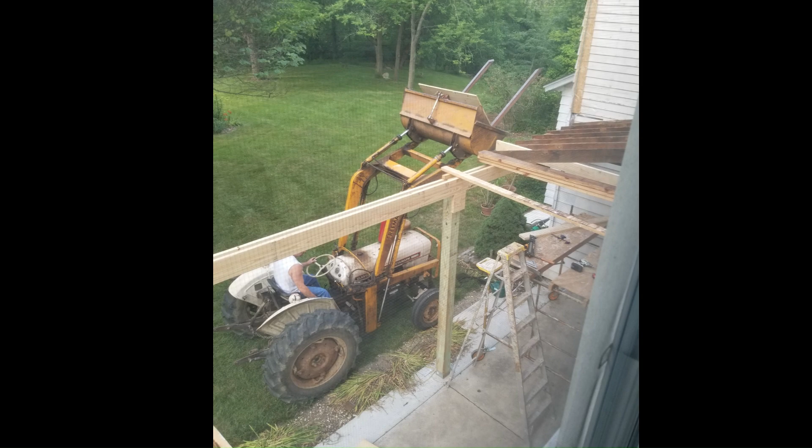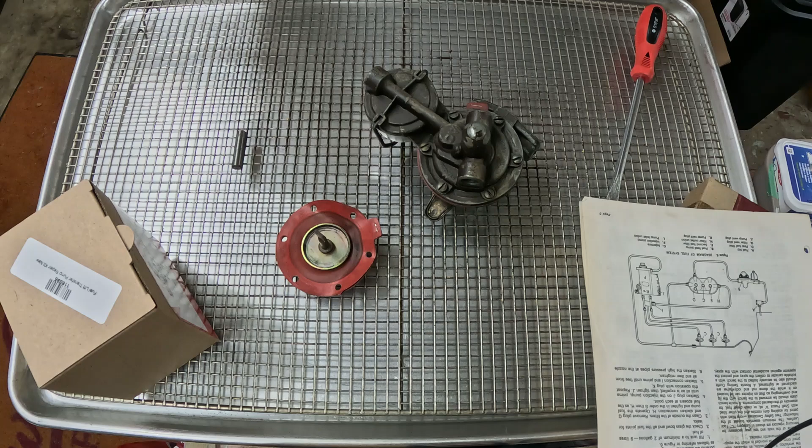Today we are looking at the fuel pump off of the David Brown Selectamatic 880. This fuel pump was also used on the 780 and the 770, all of which had the 3-cylinder diesel engines. And what the fuel pump did is it was considered a lift pump.

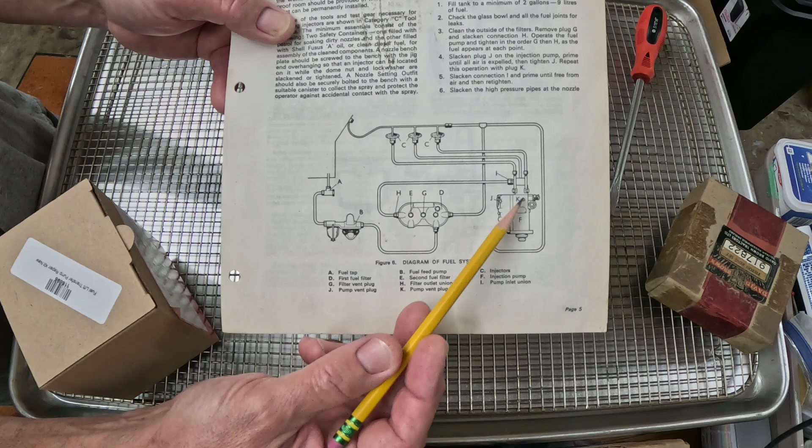And as we look at our diagram here, the lift pump comes off our fuel tank, is connected to the lift pump, which then pressurizes the fuel up into the fuel filter system, and then on into the injector pump, which then takes it over to the injectors and fires it into the engine.

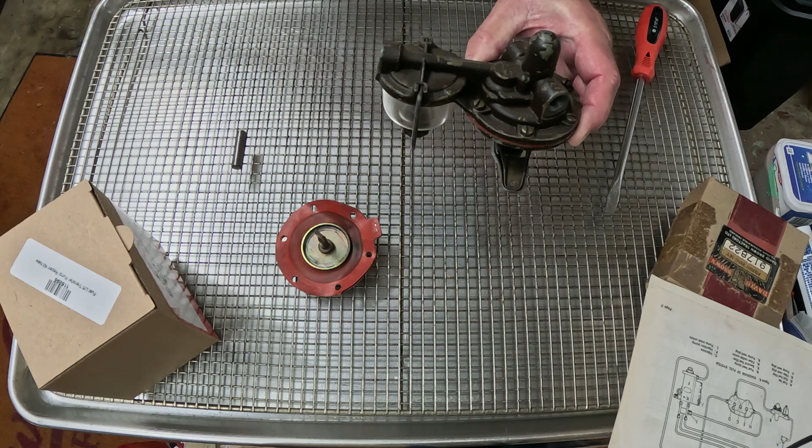This is the original lift pump. I did purchase a replacement back when I restored it in 21-22. That pump has worked fine, but we have this one, and we're just going to talk a little bit about it, take it apart, see some of the internal components on it and how it operates. This is mounted on the right side of the block under the fuel filters and the fuel system.

Here we have the inlet that comes from the fuel tank, a glass sediment bowl, and what that will do is collect the bigger pieces of sediment, and they will be trapped in this bowl. There's a screen up under here for the return into the pump so the particles can't get out of the bowl and further into the pump.

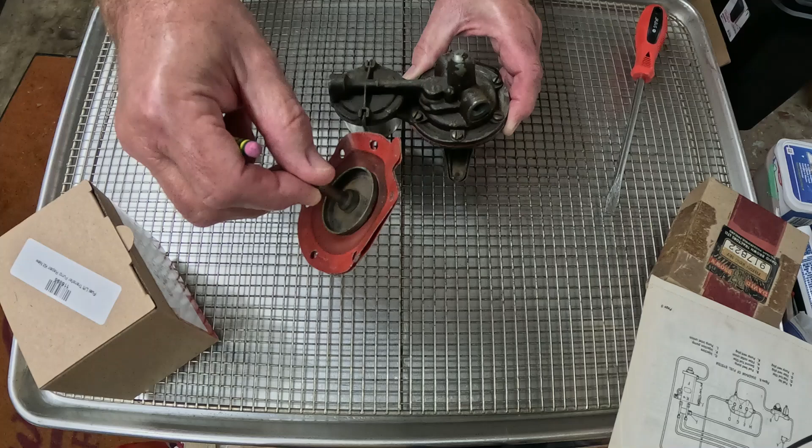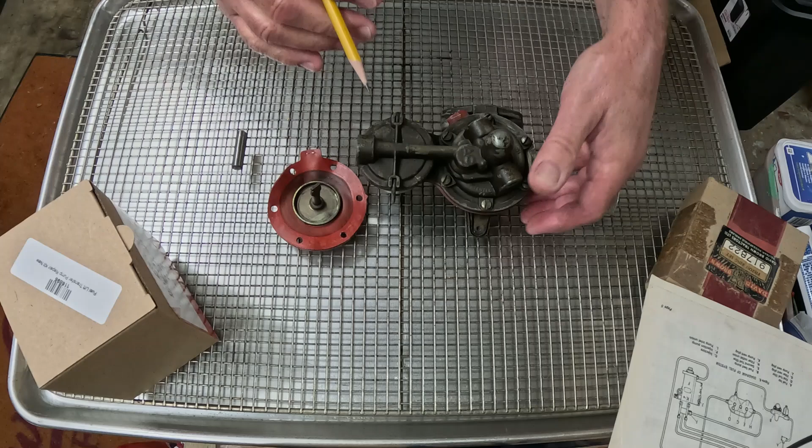Inside the pump here is a diaphragm, and we have one here. This is one of the old ones. This is the top part of the diaphragm. This is where the fuel would be. The bottom part of it, there's actually a spring in here, and then this T-looking fitting here hooks into the handle, so you can operate it manually. And that is how you would vent the system whenever you remove anything and you get air in the system. You can pump that manually to get the air out.

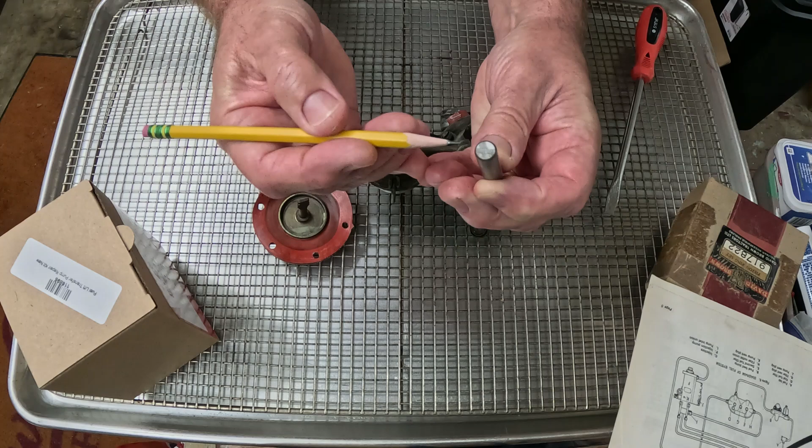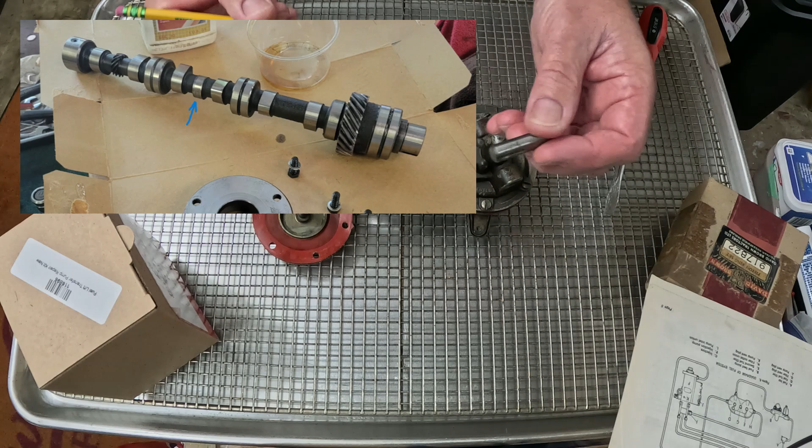The pump is operated via a push rod, which we have one here. This is the original one. If you can see, it's worn a little bit right in there. And this end is worn right across there. This is the end that was on the fuel pump. The other end goes through the block, and this rides on the camshaft. And there is a lobe on the camshaft that this rides on.

As the camshaft spins around, it would push it in and out of the block. That movement is applied back here to the lever on the pump, which causes it to go in and out. That's what operates the diaphragm inside of here.

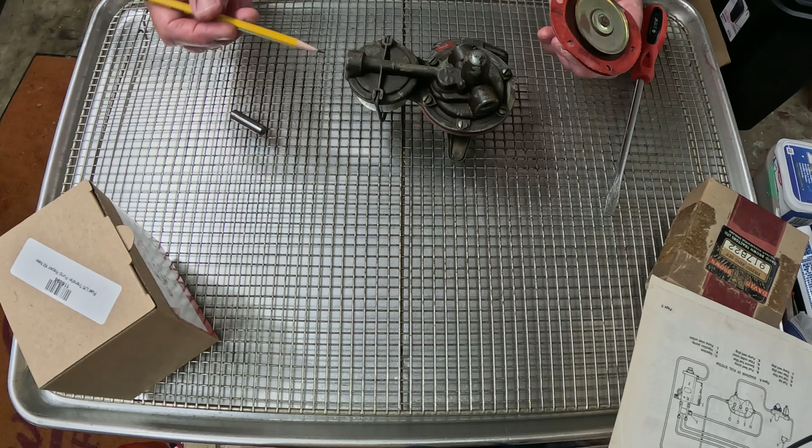So as this diaphragm is going basically up and down inside the pump, and it's not much, but it does move a bit. At first, when it goes down, it pulls the fuel in from the tank into the chamber here. There's a check valve right in here. This valve only allows the fuel to travel in. Once the diaphragm starts to push back up, this valve will shut, so that the fuel can't go back into our bowl or the tank.

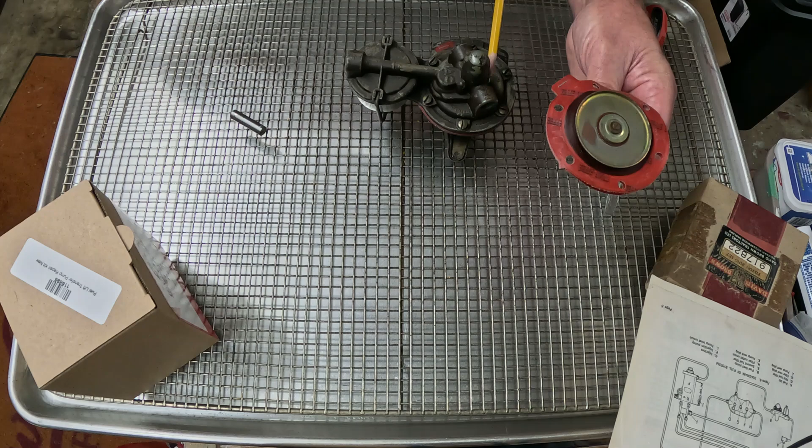If you didn't have the check valve, this thing would move up and down and the fuel would just kind of go back and forth and it wouldn't go anywhere. So they have a check valve here. There's also a check valve inside here for the outlet. It does the same thing. When this is pulling down to draw the fuel in from the tank, this one's open and this one's closed so that the fuel can't be pulled back from the filter system.

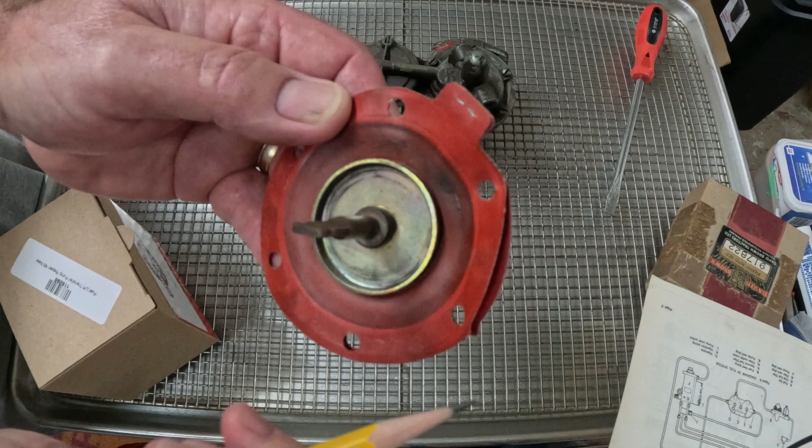The only real issues I had with the fuel pump is this diaphragm. And what happens on the diaphragm, if we look right in there, there's a tear in the diaphragm. This is a 2-layer diaphragm, but it gets a tear in it. Now this is the bottom side of it. This is the non-fuel side. This is the fuel side up here.

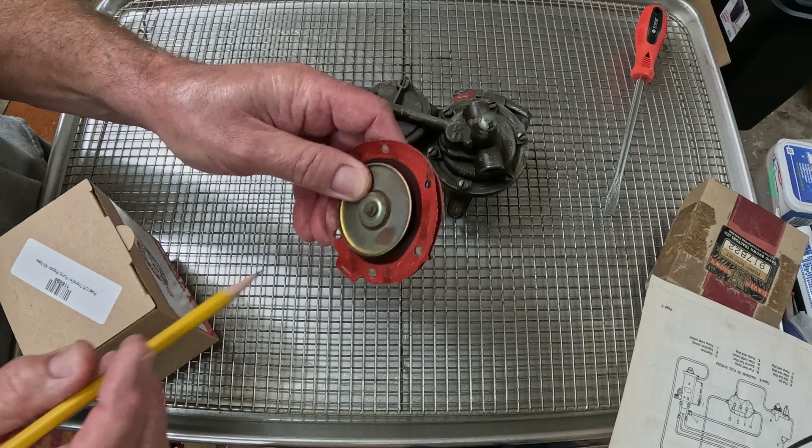And consequently, what happens, at first, you start leaking a little bit of fuel. Basically you're tearing the top layer here. You can see a crack right in there. That's the first to go, and the fuel will go in between the layers and actually start coming out around the housing here, all the way around this part here. And so that happens first, and you get fuel leakage on it. But then once it goes all the way through, it'll actually start pulling air in from the bottom here.

And once it pulls air into the system, well, you're DOA. The thing will shut down because you get air in the injectors and it no longer runs. So what we're going to do is we're going to take this thing apart a little bit.

What we have are these screws up here. Or yeah, 2, 4, 6 screws. And you will undo these screws, and then the 2 halves separate right along here, and then that's your diaphragm. You also have the sediment bowl here. You'll undo that. That is the bowl.

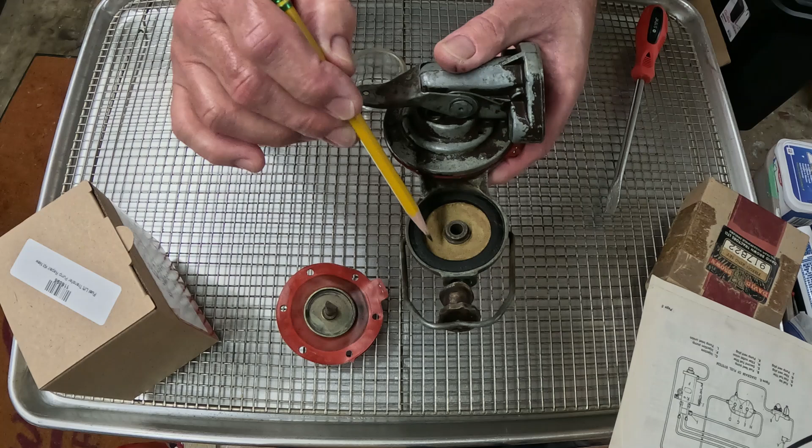And as we look in here, you have a screen all the way around here. This screen is what prevents the particles that are drawn in through this center hole from the tank and that settle inside the bowl. It prevents them from being pulled up into the pump because of that screen.

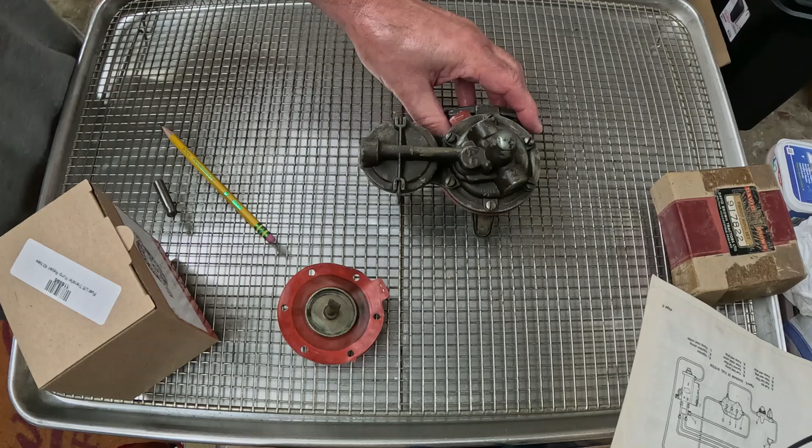So as we dismantle this thing, I got a magnetic screwdriver here. You're going to break these loose, kind of a crisscross pattern here a little bit. My screwdriver is magnetic, so it's fighting me to get on the heads of the screws here. And I hear it peeling away already. And it's not a bad idea to apply a little pressure on it, because like I say, this is spring loaded and you want to be careful. There's one screw.

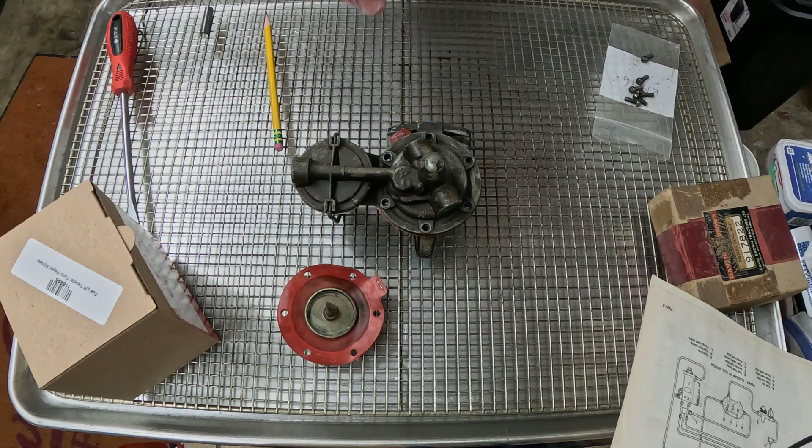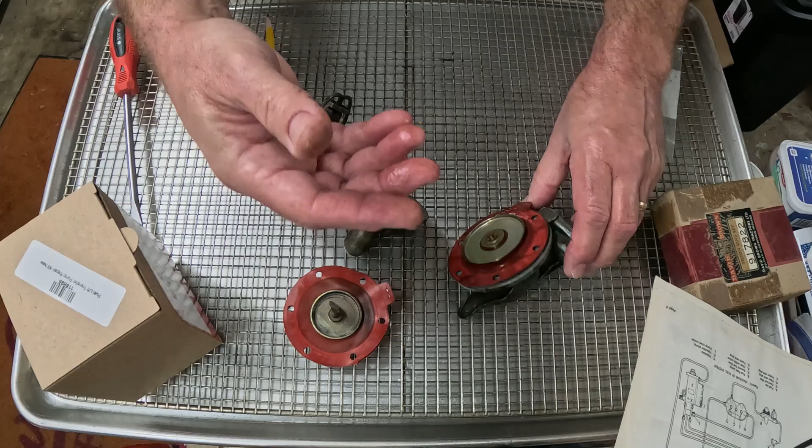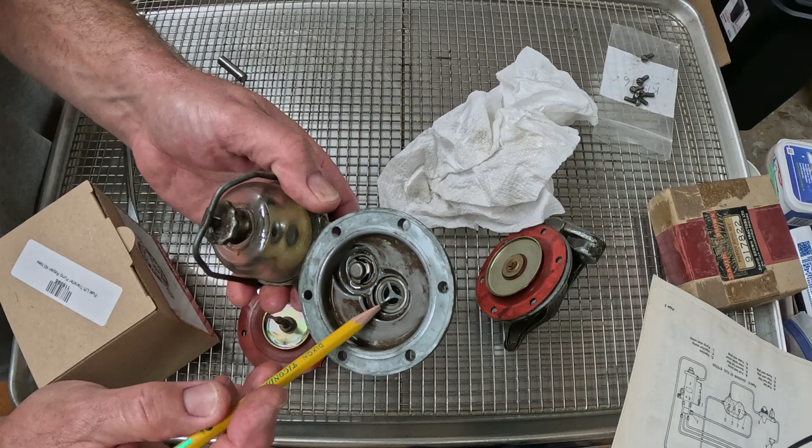So now this should come apart like so. The top half pulls away. There's our bottom half with our diaphragm in there. Set that down. Still has a little bit of fuel in it. So now in here, these are the check valves. There's one here and one here. They're both the same valve. This is one side of it and that's the other side of it.

And if you push on that, you see how that opens. Maybe we can't see that, but see how the pencil will go in there like that. This side it won't do that. This side will shut on you. But that is the 2 check valves that allow the fuel, in this case coming from the bowl. This one opens in to draw it in. And then when the diaphragm starts coming up, it pushes back down and closes this off. And then this one opens and allows the fuel to come out here in the front of the pump, which goes up into the filter system.

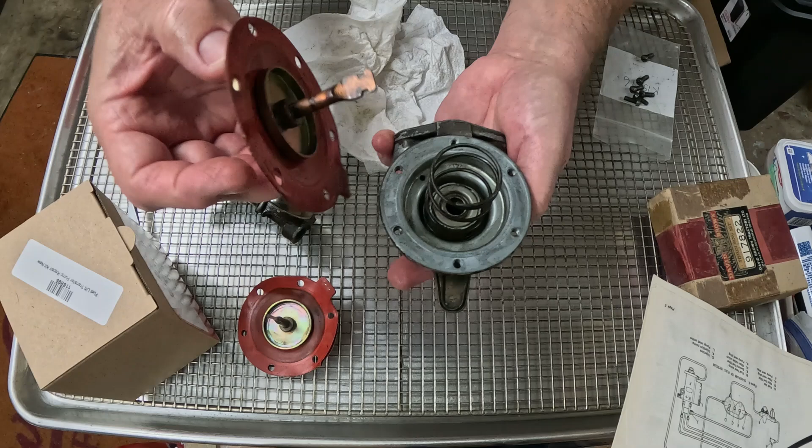And then the diaphragm is spring loaded. So we unsnap it and we lift up on it, and there it is. And then we have the spring. And this spring returns the diaphragm, so it keeps it moving. And then there's a little bit of a seal here, which looks like it's pretty much bad, probably. And that keeps dirt and stuff out.

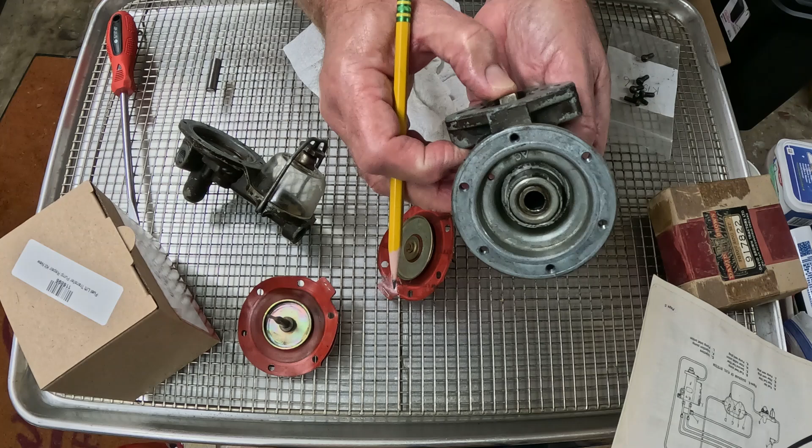Now you're going to get oil into this. There's a hole here for the push rod, which would sit on that, coming out of the block. But there's also a hole down here because this has oil that goes in on this mechanism, and then it drains back out at the bottom here, back into the sump of the engine. And then that pushes in and out, and that's what operates inside here to pull down on the diaphragm, which is connected to that shaft via that fitting there.

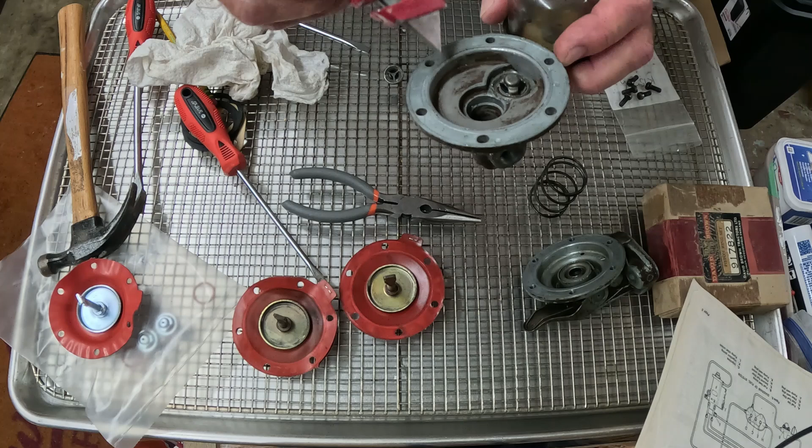So we just got this thing to pop. Now what I had to do, and we're talking about our little check valves. The one over here was already loose. And so what I did is I took my utility knife and I just kind of cut. You can kind of see down in here where they stamped the housing. So they fit these in here and then they stamped this to mushroom it over. This one had some kind of seal on it, it seems like, or sealer. And we just got it to pop out of there.

And what I did on it is I ran hot water on it. You can see the hot water down in there. And I heated the whole thing up. And they had some kind of sealer on there, it looks to me like, as we set this down here. We look right along in here, almost like a JB Weld type stuff on that. Oop. And so there again, my screwdriver's not magnetic enough, is it?

So there again, I heated it up and I took my utility knife and I dug around there a bit to get that out of the aluminum. Now the rebuild kit comes with the new diaphragm and your new check valves, as well as the gasket for the bowl and to mount it back on to the engine here. So all that comes with the kit that we purchased. But getting those things out was a little tough, so we're gonna take this over here and clean it up a little bit, and then we will come back.

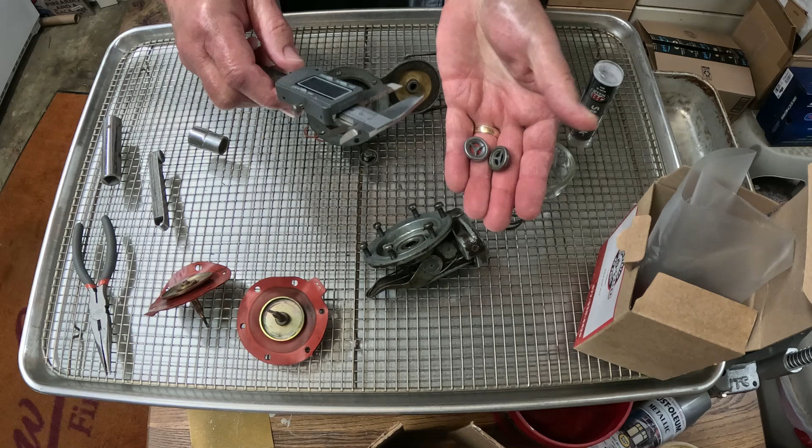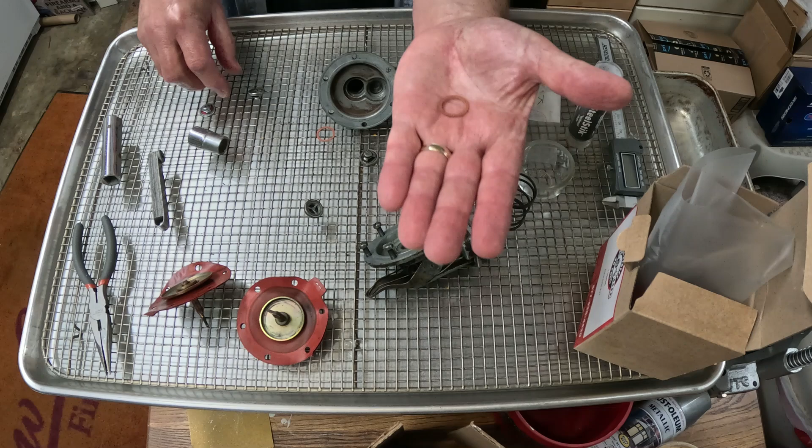So the new ones and the original ones are coming in at the same size as far as our distance across out here. So that's good, that's what we want. Now, shut that off. The new ones come with a gasket as well. And the gasket fits behind the check valve, if we put it in there like so. The original one did not have that.

But the issue that we have with it, particularly over here, that's not going to stay in there. That is so loose that no matter which way it goes, and it has to go the right way to work. That's the hole we had originally. I had to dig that out because it had like a JB Weld type material in there. So I'm thinking that perhaps this thing was machined wrong down in here. This hole was bigger than this hole, and this one seemed to be just crimped in. It's more of a press fit to fit the valve in there.

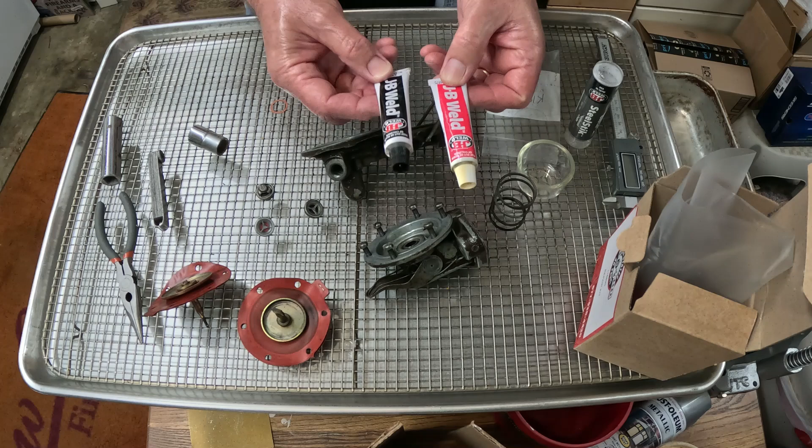And as we see it, it just kind of rocks in there. Can't even get it started halfway decent. Like so. See now there, it fell in there, but it's not gonna stay in there. I could probably pull it out with the pliers. So we may want to go ahead and use the JB Weld on both of them. I got a couple different versions here. Of course, we have our traditional JB Weld. You have your two compounds, you mix them together, and then it eventually firms up.

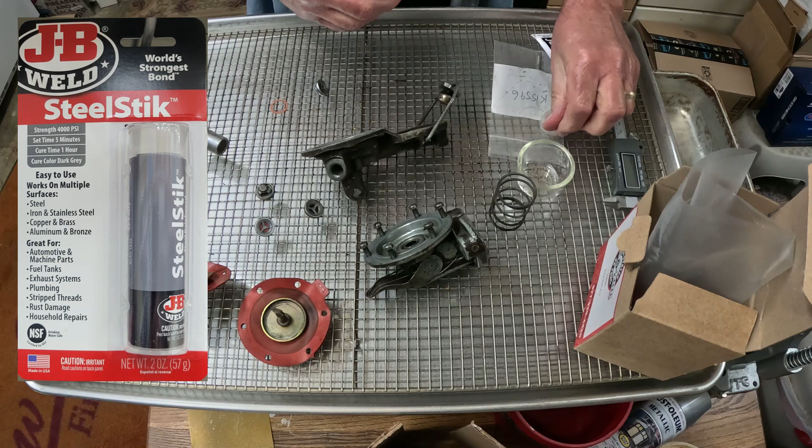We also have SteelStik. Now this one I've used before. And we have to cut a piece of it off. And as we see, it's black in the middle and gray on the outside. Those are the two compounds like you would find in the two tubes, only this is in a stick. You cut that off and you kind of knead that together so that you can utilize that for gluing it in. So we'll go ahead and break for a second here, and when we come back, we will go ahead and do that.

So let's cut a little bit of this off. Take the plastic protector off of it. And then we're just going to knead this together. Try to get a little bit of this in here. Now that I got this all kneaded together, see it's all turned black, the gray has disappeared, and that's what you're looking for on the SteelStik. And we'll kind of roll this out a little bit. And I'm just going to break some of it off down inside the hole here.

Now we can always crimp this again. Like I say, this was originally crimped in, and it did wiggle loose. One of the times that I rebuilt this pump, when I put a new diaphragm in it, it was loose, and I did crimp it in. I don't know if we can see that. We just have it right around the edge here. Not all the way around, but around it enough to hopefully seal that thing in there. And then it goes with the flat side up and the round side in.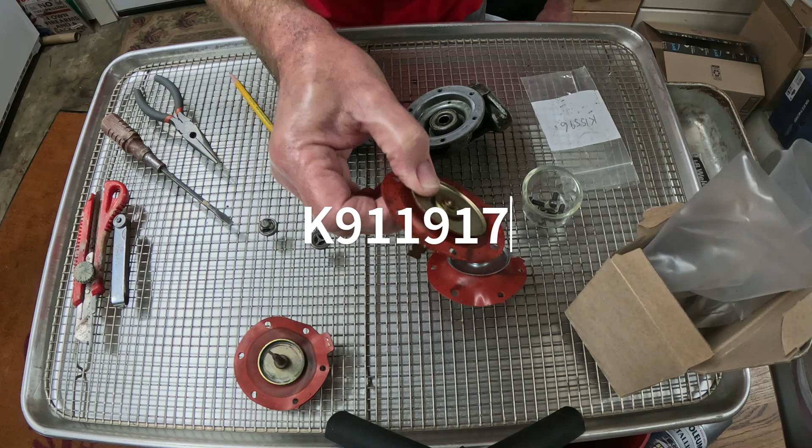So now we have to install the diaphragm. Now, all of the other times that I've rebuilt this pump, the only thing I got was the diaphragm. And that was from the Case dealership. That was the only part that they showed available for it. And so you have your spring. Now, I have seen some kits do have new springs with them. We did not have that with ours. Not sure why, but that's just the way that it is.

And we have our screws here. These are cheese head screws, they call them. Right there. Here in America, cheese. So we're going to go ahead and reassemble this. First of all, I'm going to show you the inside now. We've got a seal in here. This was stamped around the edges here, so I went ahead and stamped that back out. And we're going to try to, okay, pop the ring out of there.

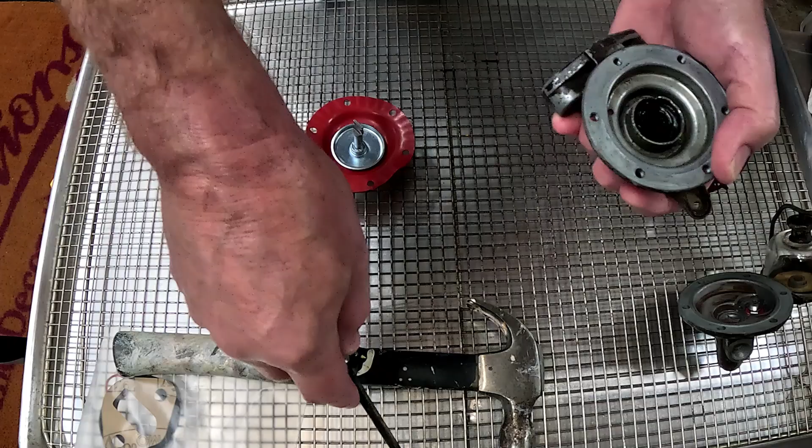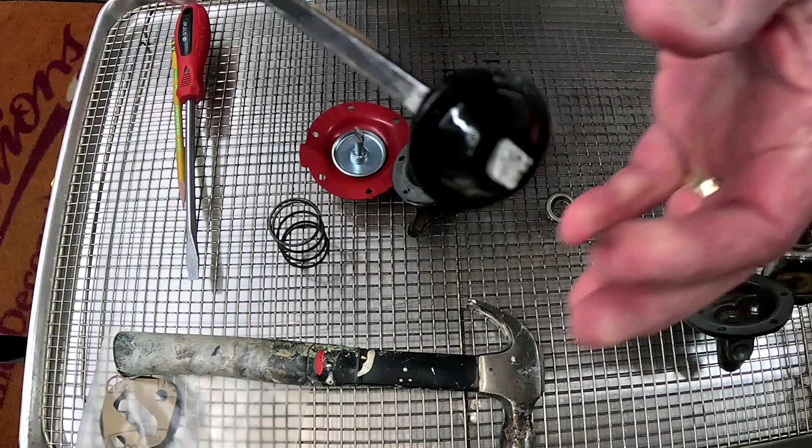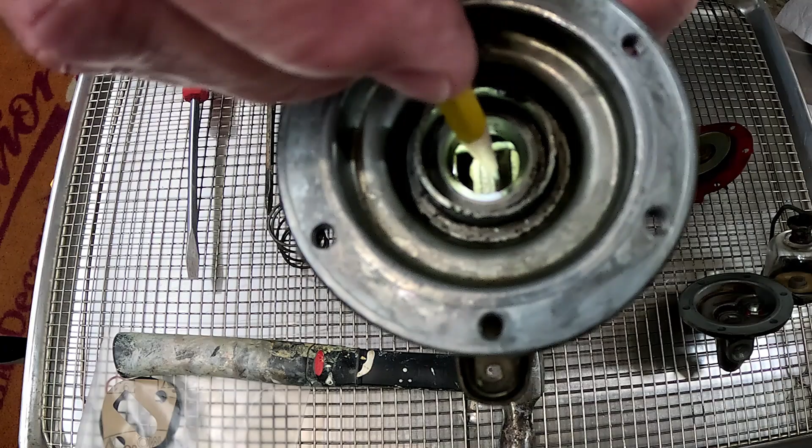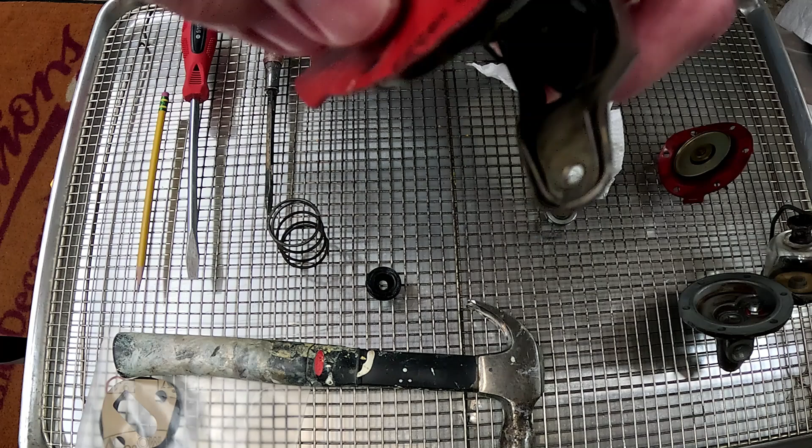And this is kind of a retainer cap that holds the seal in here, which we have right here. Go ahead and wipe this stuff off here. Now this is the seal that seals the mechanism down inside here. Let me wipe this out a bit. If we look down in there, we see the activating mechanism right here. Now what happens is the T end of this will fit into that. Lock into that.

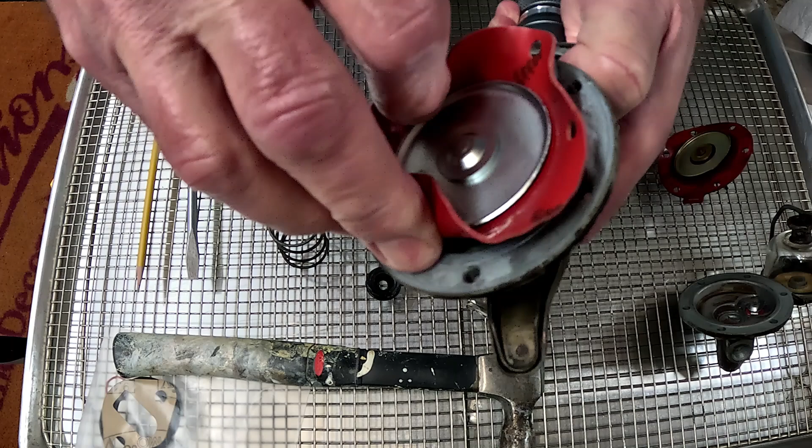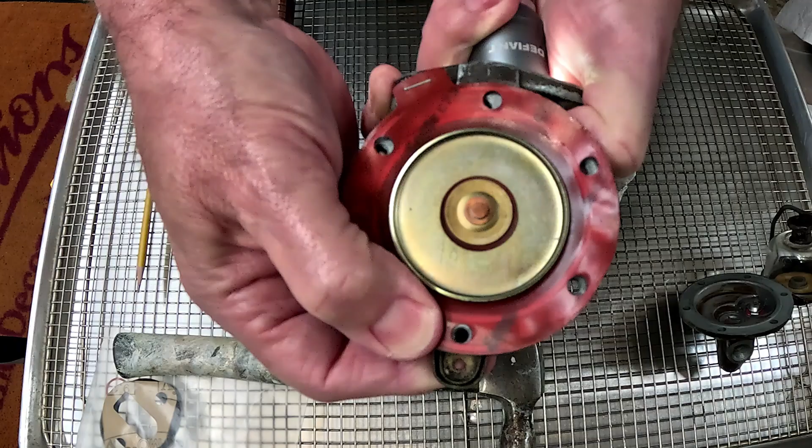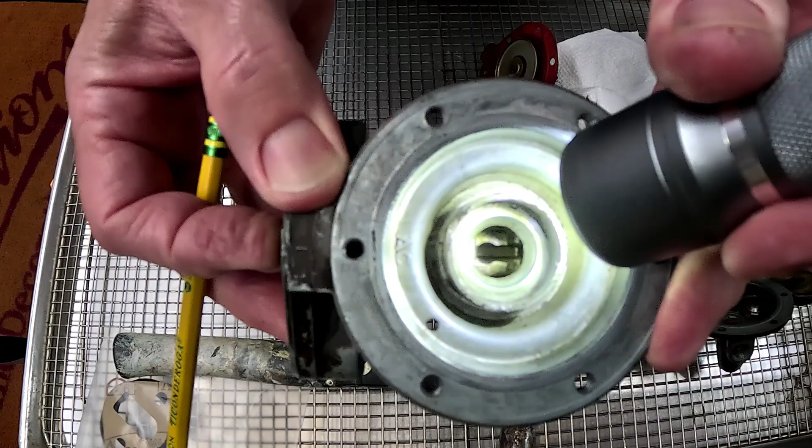I'll tell you what, this has been... So what happens is that's what activates the diaphragm, and it's going to lock into this like so. And then, see, now that's anchored so that as the pump moves, the diaphragm goes up and down. The push rod will activate it, making it go up and down. Like so. Anyway, that's the internal mechanisms on there.

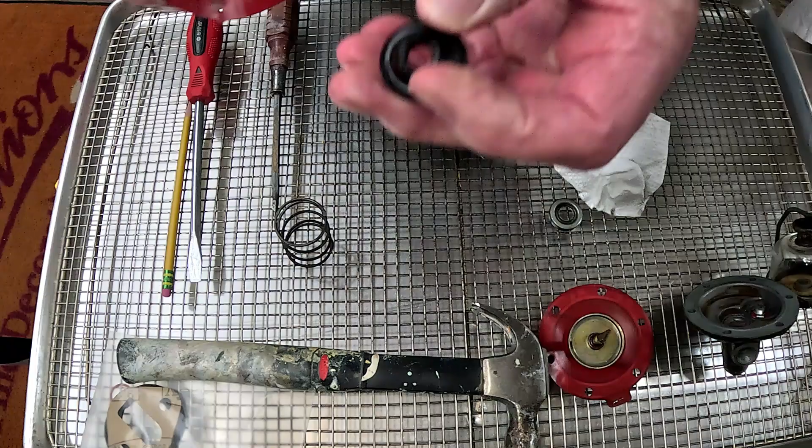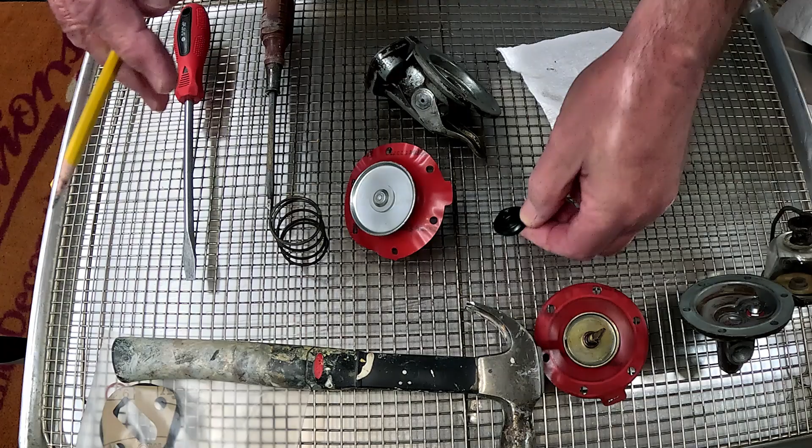And then of course this fits through there. And that's supposed to help seal the oil and stuff out of here. Obviously that's a loose fit. It's even cracked. You see we got a pretty good crack in it right there. So this seal would be nice if they had a seal like that for it. I've never seen one in any of the parts places. But I wanted to show that. And then, of course, you've got oil that's going to get back in here.

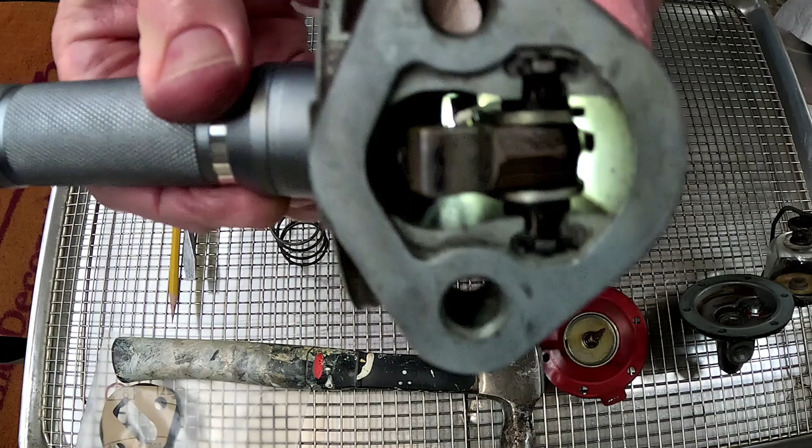As we look down in here, you can kind of see how it's lit up in there. And that's what gives you access for the oil. Comes in from the push rod up here, and then of course it drains back down the bottom. But see how that's all kind of opened up in there. Zoomed out a little bit here. Hopefully you'll be able to see me. I'm pulling this up close to me, and we're getting out of our camera range. So anyway,

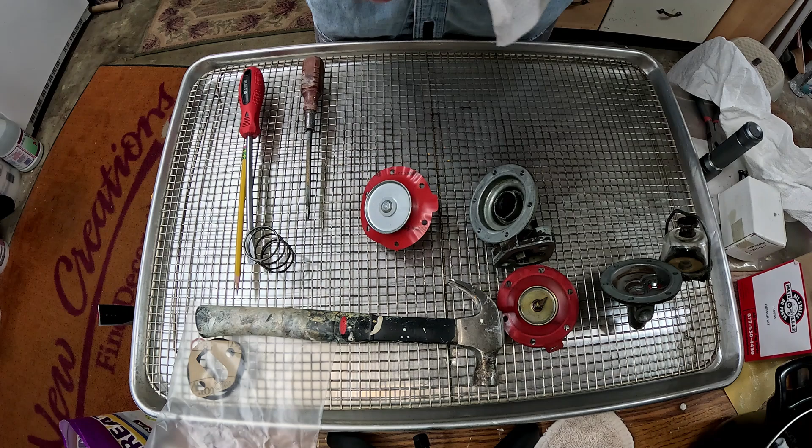just wipe a little bit of the debris out of that seat down in there. And we'll go ahead and put our little rubber seal in there. We got the retaining cap. I'll go ahead and wipe that off as well. I never noticed any oil leaking out of this particular piece. That doesn't mean that it didn't, I guess, but then we'll push that down in there. Give it a few taps, compress it down in there a little bit.

Of course, we'll be careful with this. You don't want to break it. So we got him put back in there. Okay, so the spring is going to seat down in the bottom of the housing here. And it's also going to seat into the cup of the bottom of the diaphragm. This is the fuel side, and this is the bottom, the oil side, the engine side, I guess we would call it.

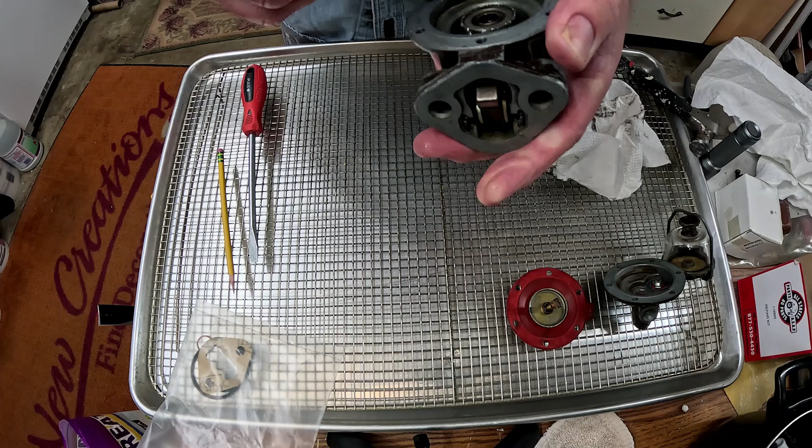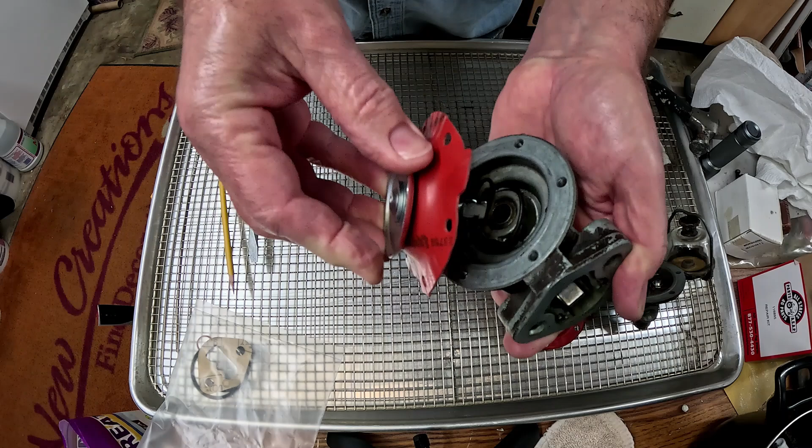And we're going to start this thing. We find our orientation tab, which is right here. And we should be able to start it down here, but that's not going to work because the orientation on this thing is off. So we need it to go in. We need our shaft, our T-fitting here, to be in parallel this way, so that it fits into the activating mechanism, and then we give it a turn to lock it in. So that's what we're going to attempt to do here. Way down in there.

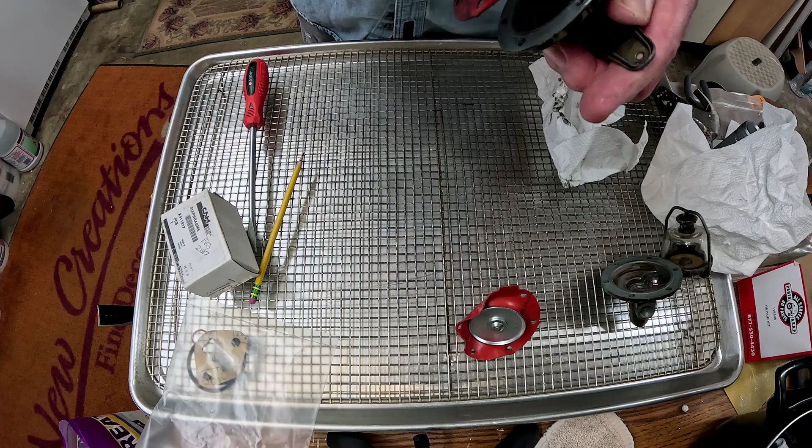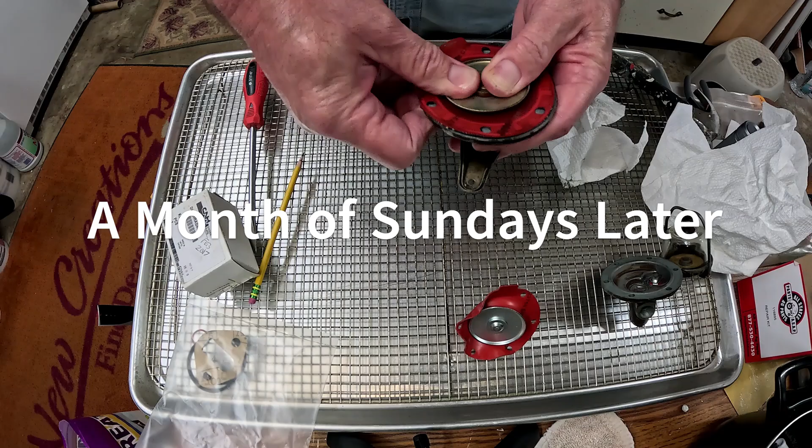Well, maybe I should just edit this as this is how you take it apart. There's no way to put the damn thing back together.

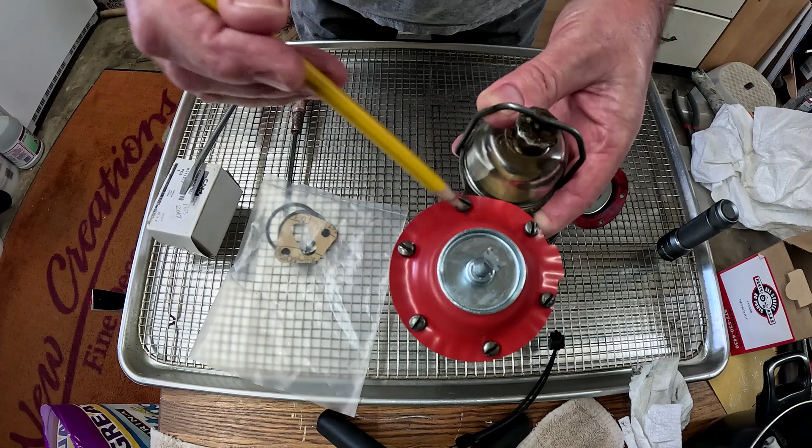So with our new diaphragm, we've got it in here, and I went ahead and put the screws in. This is the upper part of the fuel pump, the housing. I think this whole pattern, or bolt pattern around the outside, and I think the overall diameter of this diaphragm is too big for this pump, because once these screws are lined up here, now when I inserted it into the lower half and tried putting the two halves together, then these bolts didn't line up. They pushed out too far away from the housing.

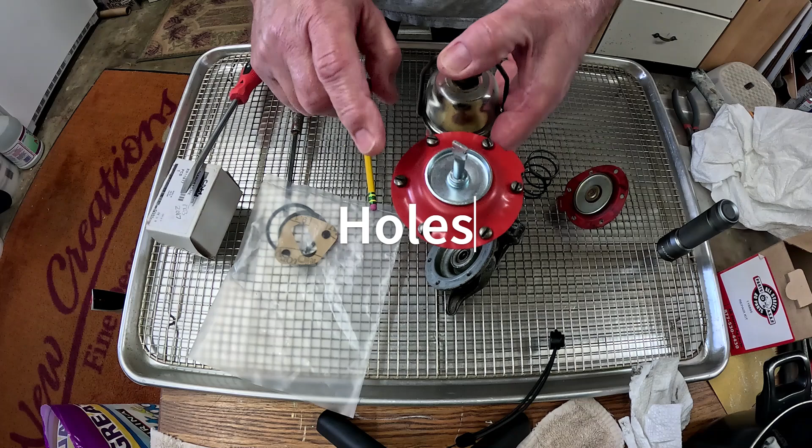So I think that this new diaphragm is just too big of a diameter for this pump. Once you get it back together, you can't get it to bolt together. So what we're going to do, I'm going to throw that down. There's just no way really to get these things to level out to look at them. But we're going to go ahead and install the original one, and at least you'll know how to do that.

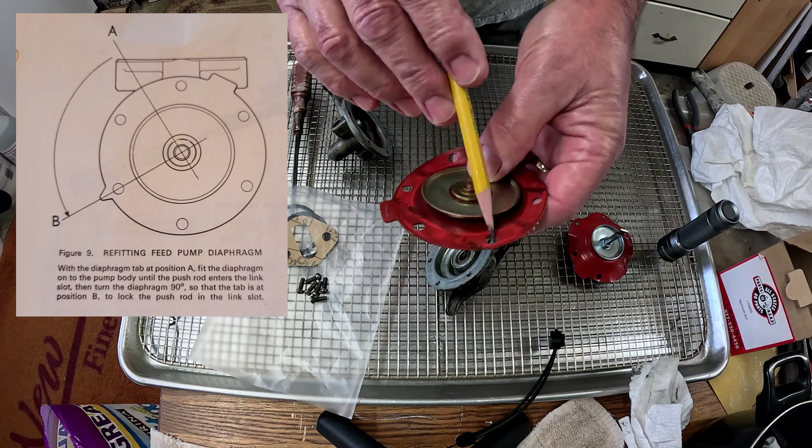Now, by the orientation in the manual, we have a little index mark right there. We got 2 holes, and then we've got this tab that's stapled together. The picture in the book shows 3 holes, so this tab would actually be over here. So the orientation of this thing is pretty much off scale. But what you want to do is insert this so that we are parallel here to the front and back of the pump. And I'm talking about our flat piece here. And that will insert down in there.

And then once you get it clicked into the mechanism, and you can feel that, then it's going to hold in place and operate properly. But in order to do that, we need to put the spring in here. And so once you put the spring in, you're getting a lot of spring pressure, and that fits into the base here, and it fits into the diaphragm up here. And then we're going to want to push that down in there. And you can feel it click into place, right like that. And then that's going to orientate us with our screws, and then that moves up and down.

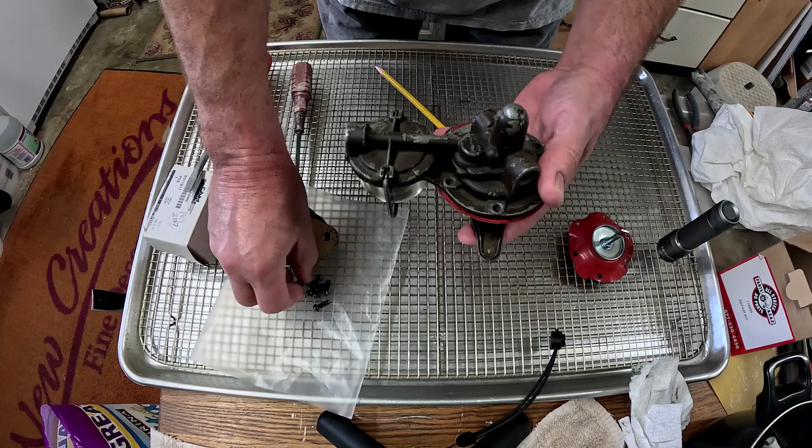And then you want to take your top half, and the orientation on it, now this is the outlet here that goes to the fuel filters. So obviously it needs to face out the front of the unit. So we're just going to line these up, and we'll put a screw in here. Just a matter of putting all 6 of the screws, getting them started in there. And then we'll tighten them down closer to the housing.

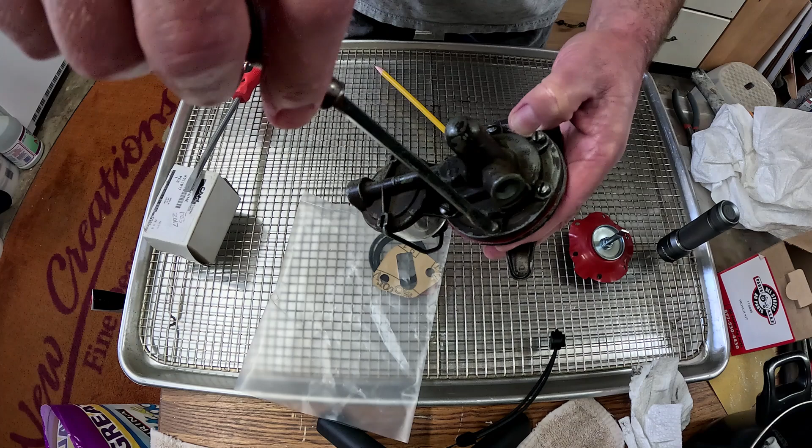And then once you get it down here close to the housing, you're going to want to pull the handle up, and that's going to pull the diaphragm down. And when you do that, then you can tighten the screws up. And there again, you kind of want to go a crisscross pattern, but you want to keep pressure on that handle to hold the diaphragm in the down position while you tighten these screws up, these cheese head screws. Like so.

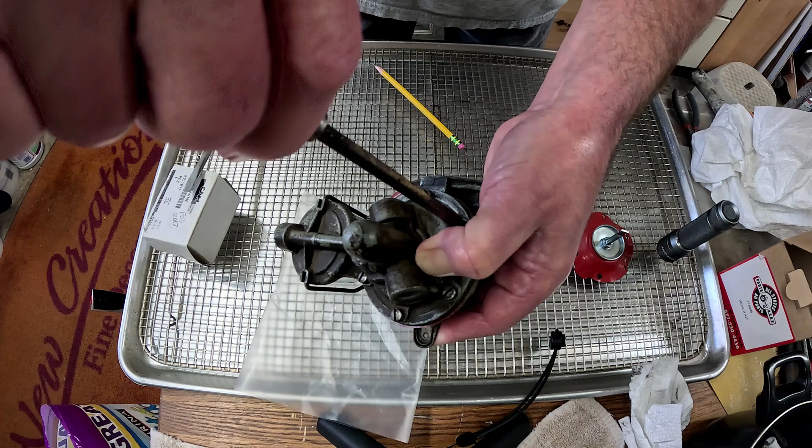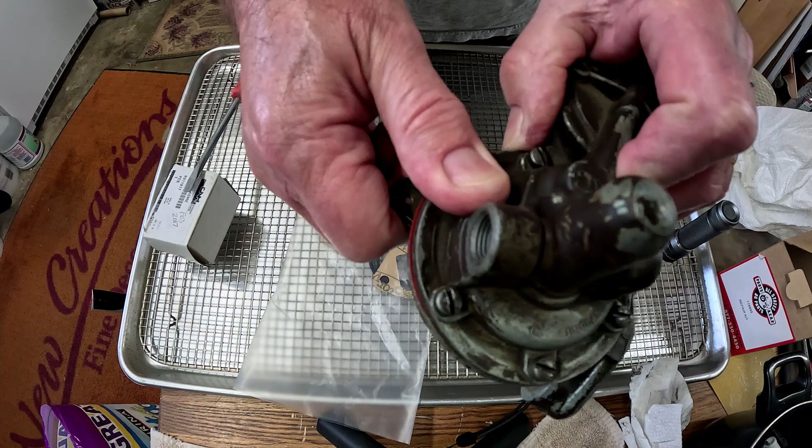And there we go. We'll just give that one more torque around it there. And voila. And then that's together. We can hear it moving. You can feel it blowing air out of there, so it's drawing in and then blowing it back out.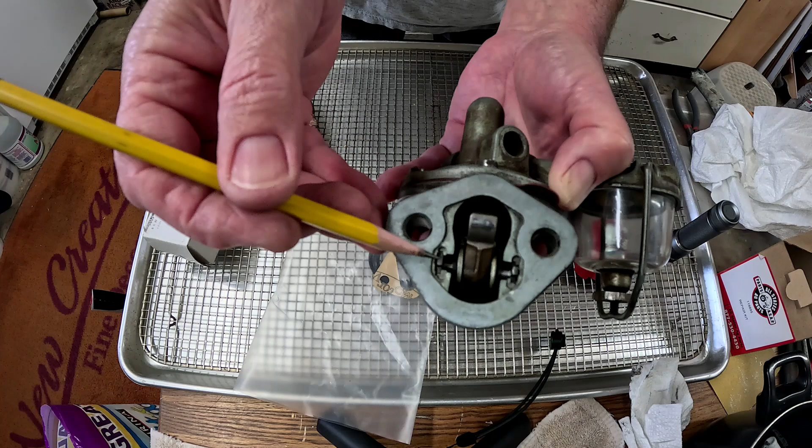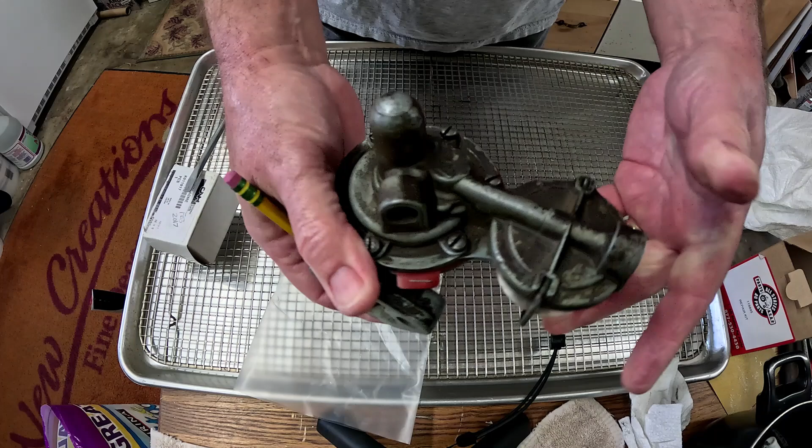If you need to remove the interior mechanisms on this, they are basically stamped, it looks like, into place right here on either side. So that could be drilled out. There's a cross shaft. Looks like an alignment tab's on there. And the interior guts will come out of that. There's really no reason to; if that wore out, then that would be the reason, I guess, to take that out. But I've never seen any parts to where you can replace that anyway.

So that's basically it for the pump. Rebuilding the David Brown 3-cylinder diesel engine fuel pump.